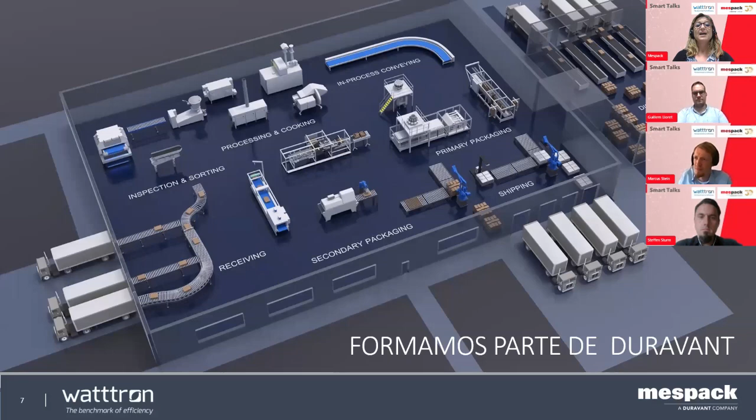Mespack, headquartered in Barcelona, is a global leader in flexible packaging and equipment for consumer packaged goods. We are known for our innovation in creating sustainable packaging solutions. Mespack has been part of Duravant since 2015, a leading player in the world of industrial equipment headquartered in Illinois.

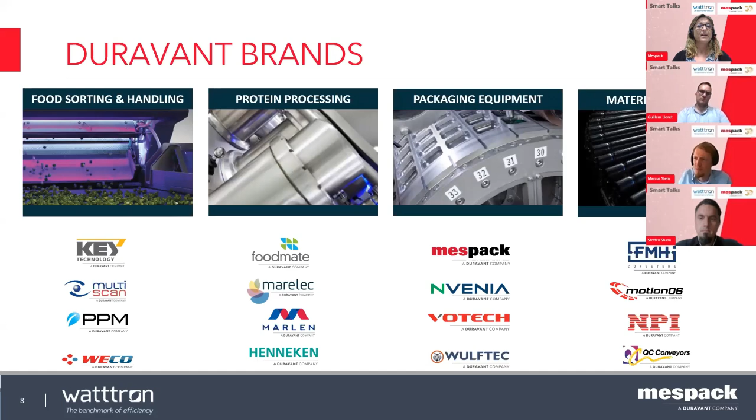Duravant is a global engineered equipment company with manufacturing, sales, and service facilities throughout North America, Europe, and Asia. Duravant offers immediate and lifelong aftermarket support across sectors serving food processing, packaging, and material handling industries worldwide through its diverse portfolio of operating companies and brands that you can see here in this slide.

About Mespack: established in 1994 as a horizontal form, fill, and seal manufacturer, it has evolved into a global one-stop shop with extensive services. With a sales team in over 90 countries and regional service centers ensuring prompt access to parts, we boast the industry's largest portfolio. With 380 employees across 17,070 square meters of facilities, our production centers are in Spain, the US, and India.

Mespack provides solutions for various industries, including food, beverage, pet food, pharmaceuticals, personal care, and home care. Additionally, we serve industries such as lawn and garden, agriculture, tobacco, automotive, and more. At Mespack, our talented engineering team designs customized integrated solutions for primary, secondary packaging, and end-of-line processes.

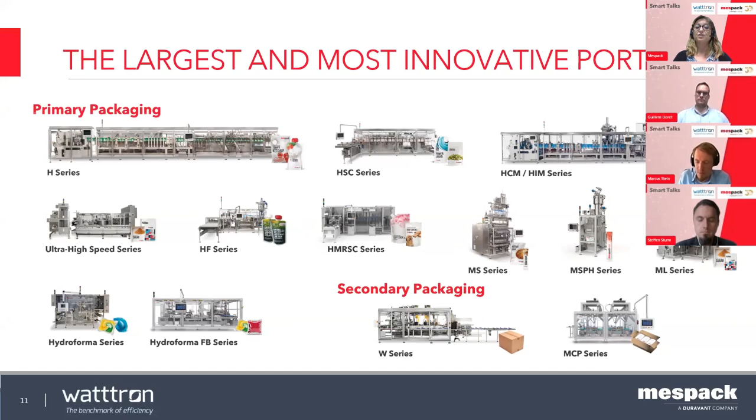With our extensive portfolio that you can see here, we offer high-precision, efficient, and versatile horizontal form, fill, and seal machines for flexible packaging, including machinery for pre-made pouches and a wide range of vertical form, fill, and seal equipment. Additionally, we provide hydroforma machines for water-soluble pods and end-of-line equipment to fit your secondary packaging needs, offering turnkey solutions if it's needed. So this marks the beginning of our introduction to Mespack, providing you the opportunity to familiarize yourself with who we are.

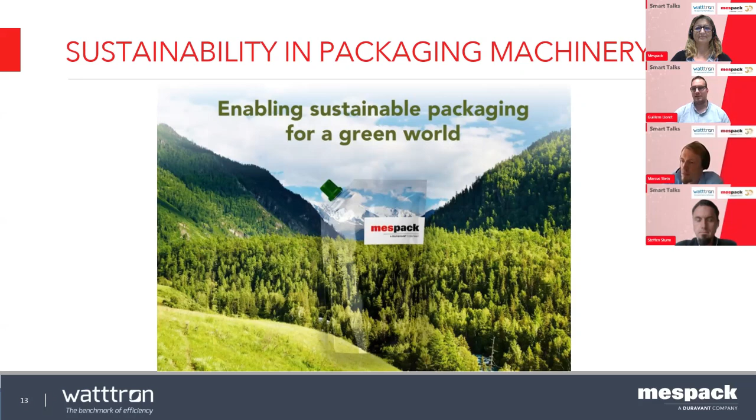No problem. Okay, so let's start with sustainability. What you can read here is our enabling sustainable packaging for a green world. This is really rooted in our DNA because we believe that we just have one planet, and it's all of our duties to keep it as best as possible, because otherwise we have no place to live. So with Mespack, we put a lot of effort and energy into developing new things to help our customers embrace this journey with us, so that every day packaging will be greener.

So to do this and conceptualize it, we have created the 6R strategies. All of you that have heard about these sustainability topics, you will know that it's all about R's, so everyone is making their own R's. So we have divided them into 3 different buckets. The first one is for materials, so what can we do on materials to make them better, either directly or with our partners. The second one is related to equipment, and the last one is to packaging.

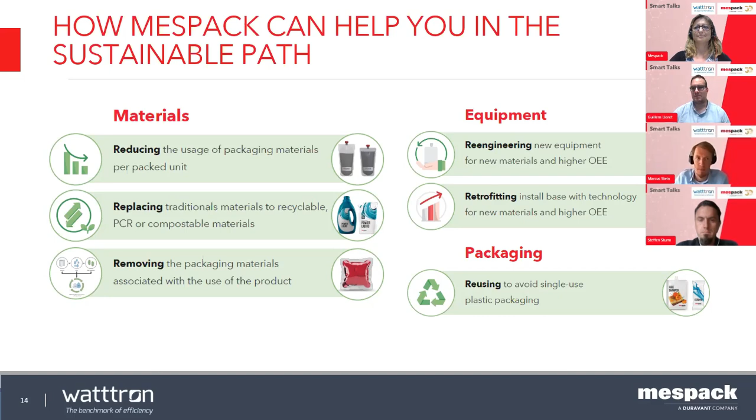On the material side, we have 3: reducing, basically using less; replacing, changing materials which are not sustainable for those which are; removing, which would be packaging that disappears. Then on the equipment side: re-engineering, to adapt our machines to work with the materials created through those previous 3 R's, and retrofitting, so that this technology can be placed in existing machines. Last but not least, reusing, which basically follows the path of eliminating single-use products.

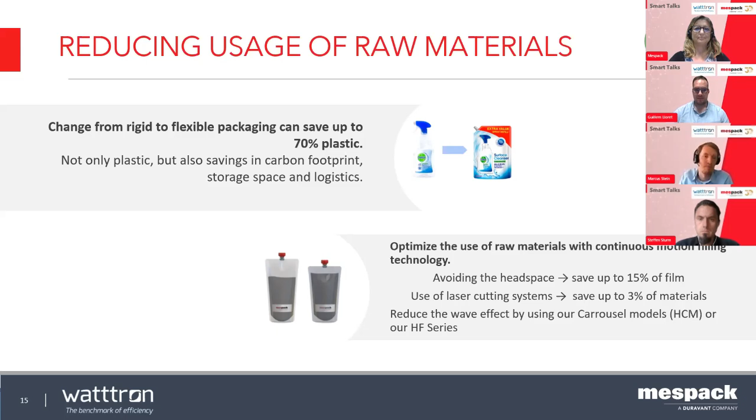The second R is replacing. We are in a position today, or a couple of years before today, where we had plenty of materials, basically PET materials or nylons, that were performing really well. We had answers for all the needs, with all types of barriers, products, sizes and shapes you could think of. But they had a very big downside: those materials were made by merging different types of polymers that could not be separated from one another. The new stream of materials, the sustainable ones that have come now, are recyclable, so that's a very good thing.

They comply with the regulations, but they are a little bit more difficult to work with in our machines. We have to face basically two different issues that are the most relevant. The first one is that they tend to be a little bit stretchy, so it's more difficult to control the accuracy of the machine. And the second one is that heat affects them much more.

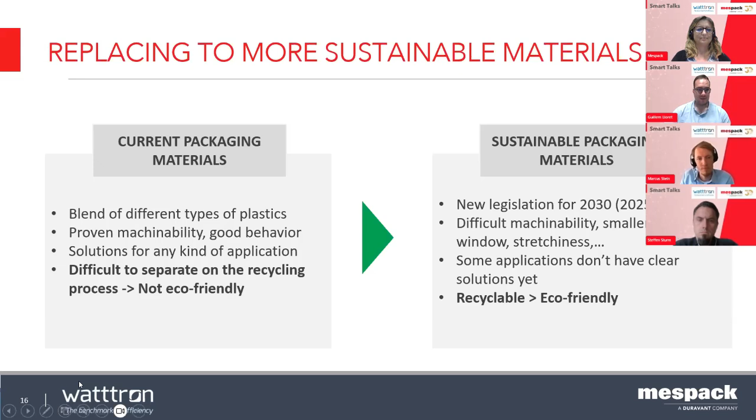So the sealing windows that we can work with are much more narrow. That's one of the whys we decided to make this partnership with watttron, and we'll explain how they can do that better than me later.

On the streams of materials that we see today, we are focusing now on recyclable-ready materials, which would be what they call the monos. Basically, the whole structure of the film is made with different versions of the same polymer, either polyethylene or polypropylene.

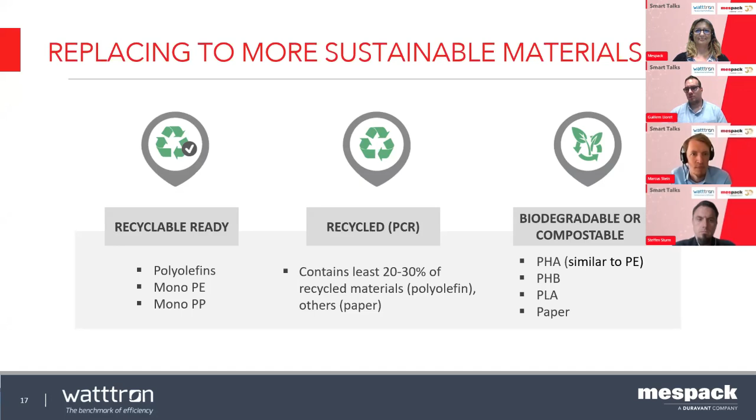There is a second stream of materials coming today that we are seeing more and more, which is basically paper, and also adding PCR, so film that has already been processed and recycled into the film structures. And the one we see more in the future, not yet here, would be the biodegradable or compostable materials like PHA or PHB.

This slide just shows some examples of what we have been working on in this regard of replacing, basically, the use of paper. This is very extensive on our customers that pack either powder or solids.

We've been working a lot on adapting technology for controlling these smaller differences, and you will see why with watttron we got a very good solution on that.

And also, we've been working with the biodegradable plastic films. This is a project that is ongoing. We don't have a solution yet, but it's worth mentioning because we believe it's the next step.

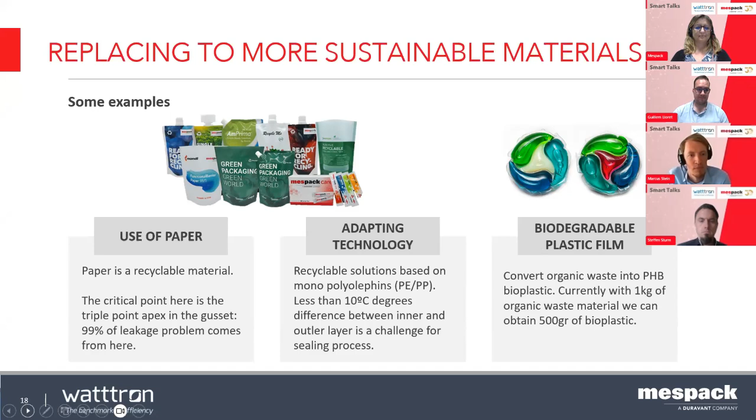Sorry, it went too far.

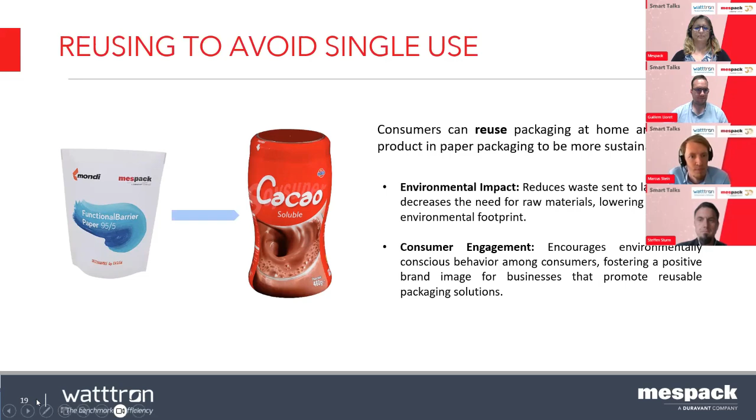But all these materials, as I mentioned, are a little bit trickier to work with. So we need to re-engineer our machines, make them better, make them more precise, to be able to work with them and keep the same performances that we are having today.

We have developed a lot of different technologies. Today we will talk about maybe one of the most modern or future-proof that you can see.

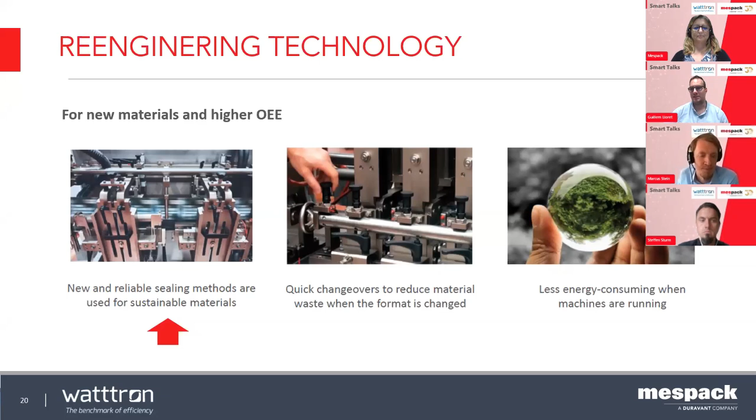But basically, when we do that, we face different targets to do it. Basically, that they do the job that it's required, but also that they will use less energy and that they will bring the quick changeover embedded on.

But with all these technologies, we keep in mind that our customers already have machines, and we cannot say, look, you have to throw your machine and buy a new one, because we know that's completely impossible. So everything we think of, we always think that there are machines in the market and that has to be able to be implemented there. This is not 100% of the time, but we try that at least 99% it will happen.

Here we put just some examples. The first one is the smart digital sealing from watttron that they will soon explain how it works. And there are other examples like the bottom jaw cooling or perforators with larger stroke. Those are technologies that we have been developing. This is just written as an example.

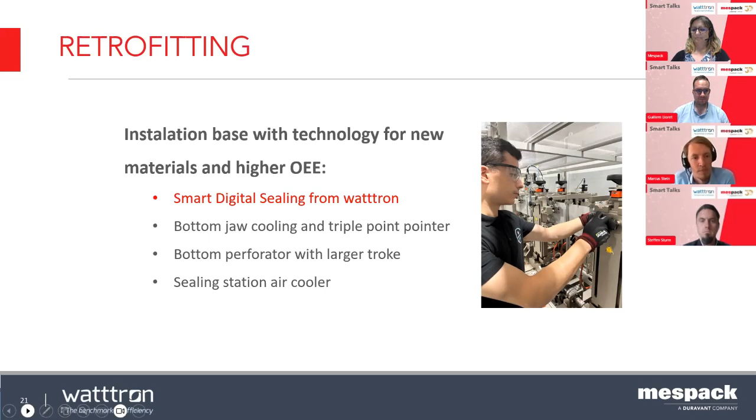And before passing it to the guys from watttron, I wanted to give 5 quick bullet points about why, so what we were looking for when we decided to make this partnership. The first one is to be much more precise on how we control temperature. As I mentioned, the new materials are much more tricky to work with, so that was a must for us. The second one, their process is fast, so they can heat up and cool down in a very fast way.

This can bring us a lot of benefits, especially when we start and stop the machine. We wanted the system to be energy efficient. Today energy costs are not super high, but in the future we foresee that they can be.

So we think that it's a good thing for the future. We wanted it to be integrated with Athena, our software platform, and whatever we would do, we wanted to have a seamless integration with it. We are developing that together and we will have this. We also wanted the system to provide us with data to do things in the future, and they can check all these 5 boxes properly.

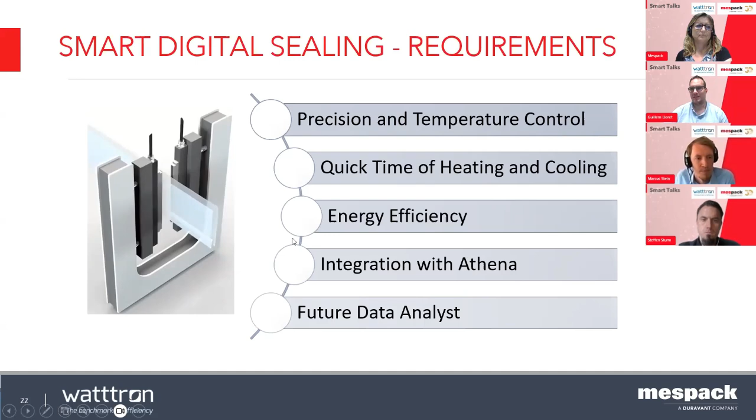Okay, so I pass it to Marcus.

Many thanks for your explanation. I think, first of all, thanks Guillem for doing your presentation. I can now only reinforce your points—you already raised the main points about our technology. It's a great pleasure for me and my colleague Steffen to talk to you about the great cooperation between Mespack and us, and to give you a little bit more insight into our digital heating systems.

So for me, the goal is the following: first, I want to demonstrate the clear benefits regarding increasing the productivity and efficiency of your production lines or packaging lines today. Secondly, I want to explain why digital heating is, for us, really the enabling technology when it comes to monomaterials and monomaterial processing.

And the third one, already shown and mentioned by Guillem, is that we are not only looking at new machines. The system has a great advantage in that it can be very easily integrated into existing machines and implemented as a retrofit.

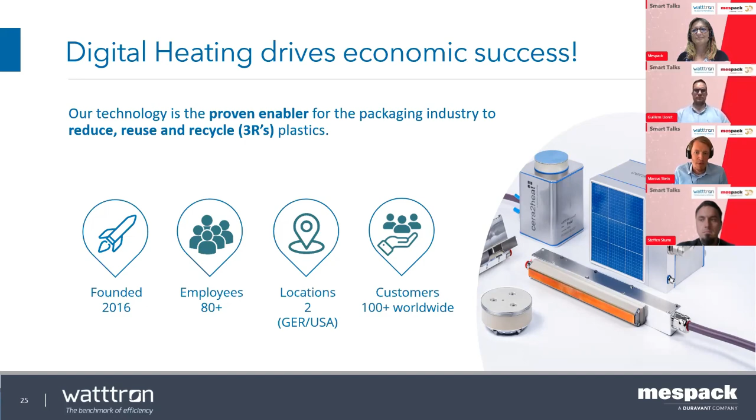But let me come back to the technology, and let me start with a short summary of the aspects or topics raised by our existing customers—typically the biggest challenges, even when processing normal materials, but much more so when it comes to monomaterials.

That's really the biggest and most relevant reason why recyclable monomaterials are still used so rarely. More CPGs are reporting, and you can see this in the media, that they are much behind their own goals set for using recyclable packages. This is due to the lack of productivity compared to standard laminates.

This lack of productivity is mainly caused by a forced decrease of machine speed and an increase of losses during production, for example during a restart of a machine. We saw a real case at a customer who had to lose 25 pouches when restarting the machine after a stop. After the retrofit, he only loses 4 pouches, which is a relevant factor when deciding whether to change to monomaterial or not.

The second aspect is the much higher risk of quality issues with pouches or pillow bags made with monomaterials. It's clearly measurable, typically as an increase of packages with leakages, mostly in the triple point, which is the critical area, or you have clear burning marks or strained areas in the heated area.

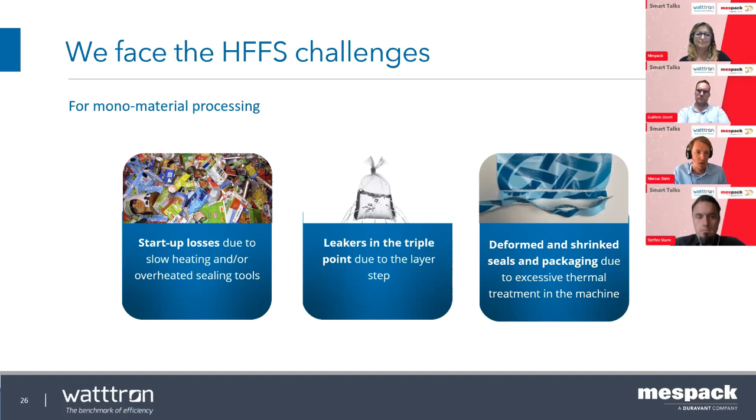So the question now is why digital heating is solving these quality issues, and why equipped machines in the field already show a clear improvement in performance and an increased number of qualitative packages. What is the magic? The magic is local defined heating.

Instead of a large heating source, like a heat cartridge in a sealing jaw, which shows a very slow running control performance with many delays in the reaction of the heating system causing temperature variations, we created a heating system we call digital heating, based on very small and individually controllable heating pixels.

The pixels are very small, only about 5 by 5 millimeters. This is very specific: each pixel, and I really mean each pixel, each 5 millimeter heat area, is heated and controlled separately from each other.

These pixels heat directly on the surface and are only covered with a small metal layer, which at the end is the sealing profile.

For the engineers in the audience, such a pixel can heat up with up to 70 watts per square centimeter, so they are very powerful. In comparison, a normal heating jaw has only 5 to 10 watts per square centimeter. This gives a very high dynamic of control and fast heat up, combined with low thermal mass, resulting in very defined, local, and precise heating.

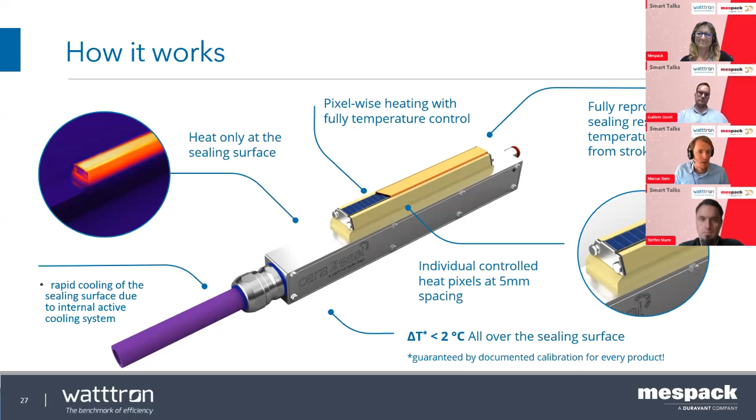Thank you, Markus. So Markus introduced to you what is behind, or more or less inside the sealing jaw, but what does it mean regarding a whole packaging machine? For example, let's have a look at a Mespack HFFS sealing machine.

So we have and will provide different types and shapes of sealing jaws, all with the same technique: pixel-wise heating in a really small resolution of heating pixels.

For example, we have these vertical sealers. Markus mentioned, and also Guillem, that you can adjust pixel-wise, especially in the most important area, the triple point.

You can adjust for special monomaterials very precisely the temperature, and then you are able to achieve this really narrow sealing window. Then we have two different types of bottom sealing jaws, the straight one and the format sealing jaw, which can be provided with different format plates, different shapes, and so on, according to the needs from the customers.

And we have these top seal sealing jaws, the flat one, which is more or less the same as the vertical, but in another design outside.

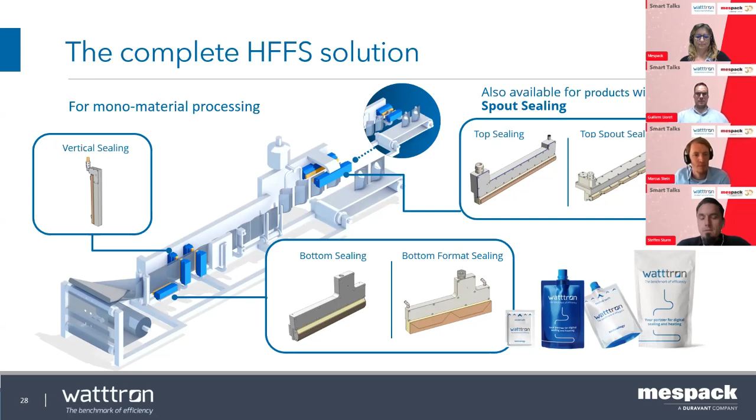For that, it means we can equip a whole machine with the digital sealing. What else? We have tools for the HFFS circular as well, what we call internally the high speed or higher speed machines. We can provide tools for VFFS machines, which have some more differences and advantages regarding the layer jump to the fin sealing.

This is also all regarding flexible packaging, and besides flexible packaging, we can also provide sealing tools for rigid packaging, for FFS cups and FFS trays. By the way, besides our sealing tools, we also provide heating elements to produce these trays and cups as well.

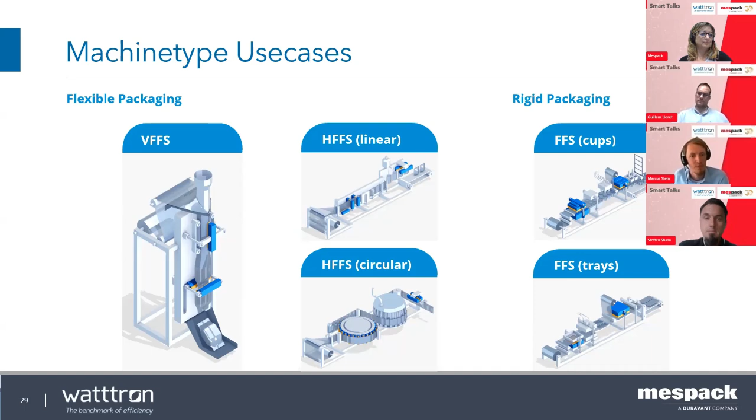So what does it mean? Guillem talked a little bit about it. The main USPs on our side are processing the monomaterial, which we talked about for the last 30 minutes.

Energy saving, I will show you some slides later on. The fast ramp up and cool down is really a tricky thing, because we are able to run the sealing jaws with 10 to 20 Kelvin per second, or degrees Celsius.

That means you will be ready to seal within seconds. And also the cool down will be much faster than if you have a full metal sealing jaw with a heat cartridge.

Marcus said the machine integration is really easy, for new machines of course, and also for retrofit. We have done a lot of retrofit installations on old machines, some of them in the age of 30 or 40 years, so it's no problem to integrate them into the machine. Also, if there are machines which are a little bit tricky, we have good engineers to solve these problems as well.

And by the way, we can also increase the productivity because of the lower amount of not well-sealed products, and by reducing the start and stop pouches.

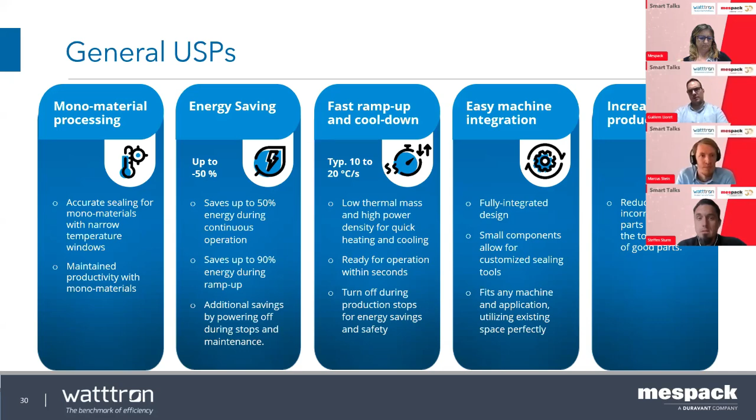Here on the right side, you see our user interface. We can talk about that later on, but just to show you how it looks, we can provide such temperature profiles to achieve a better sealing on the triple point, and we can also switch off sealing jaws in case of having smaller pouches but a large sealing jaw, and so on.

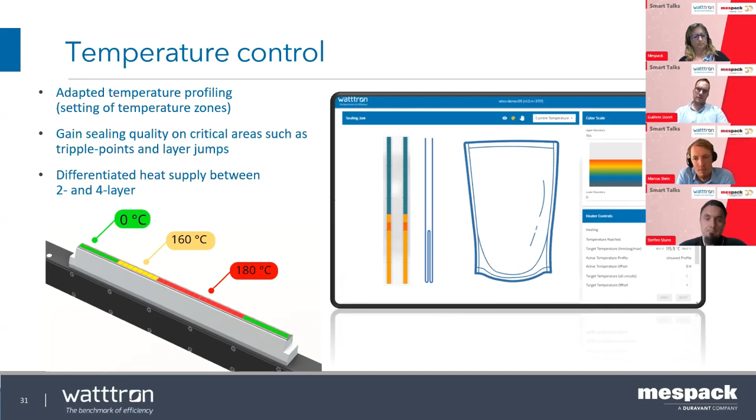Coming to the saving potential, this is just an example, and as we have also seen on retrofit machines and installations in the last months, by using the Watttron cera2seal technique, our customers have been able to increase their outcome. Just to give you an idea of what that means in cash, this is just an example.

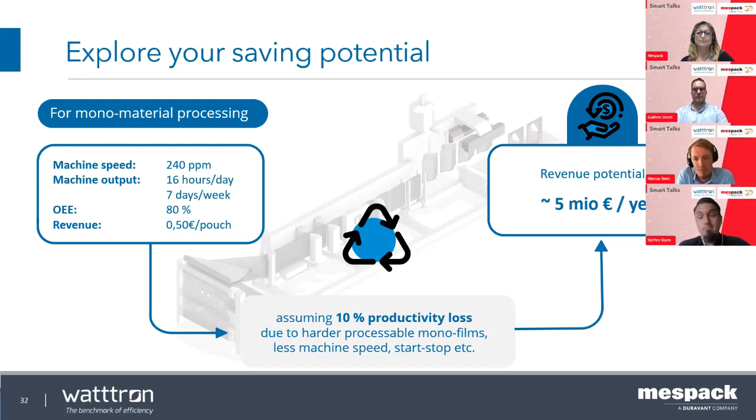That means if you open the machine and the operators need to do some cleaning and so on, you can touch the sealing jaw while heating. So this means really less thermal impact in the machine.

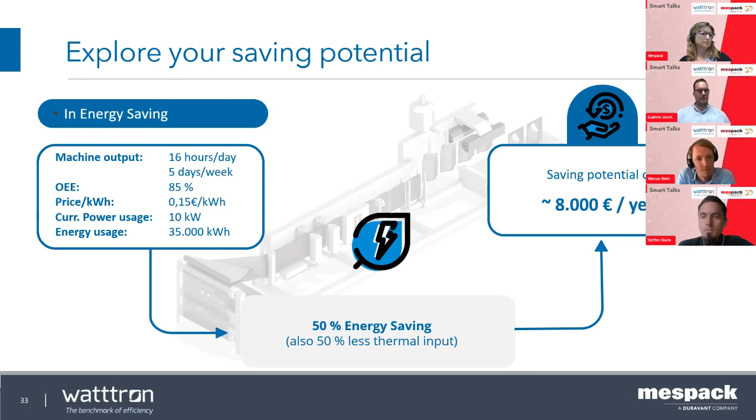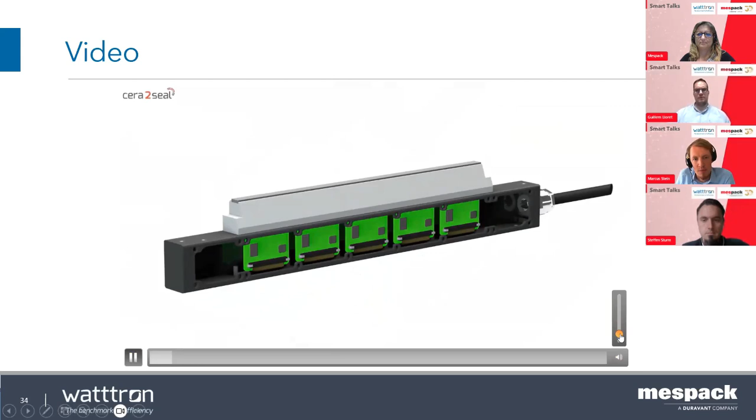So it should work. Yeah, I think we see again a short summary of this, what Steffen and Guillem and I measured.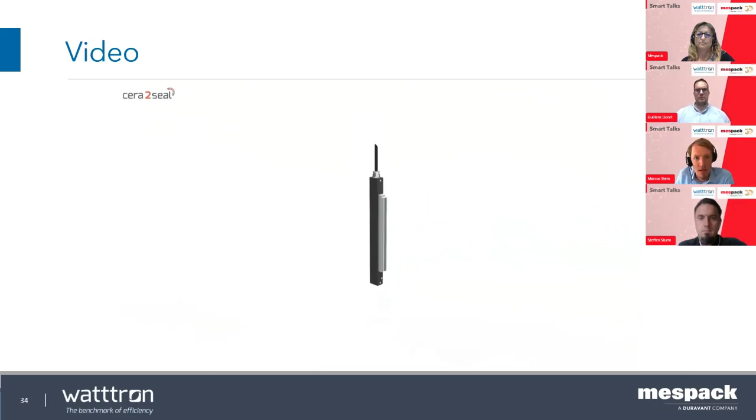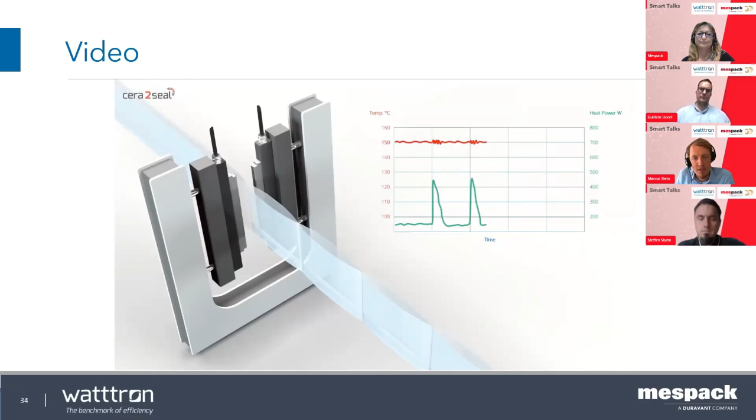We have the sealing jaw with the heating pixels behind such a sealing profile, and the sealing profile can be the standard like you have today. But very important to understand is that the sealing jaw works quite differently than a standard system. It's heating in the moment when you have heat consumption. And if there is no heat consumption, for example, you stop the machine, it stops heating but keeps the temperature constant. This is the difference: heating on demand.

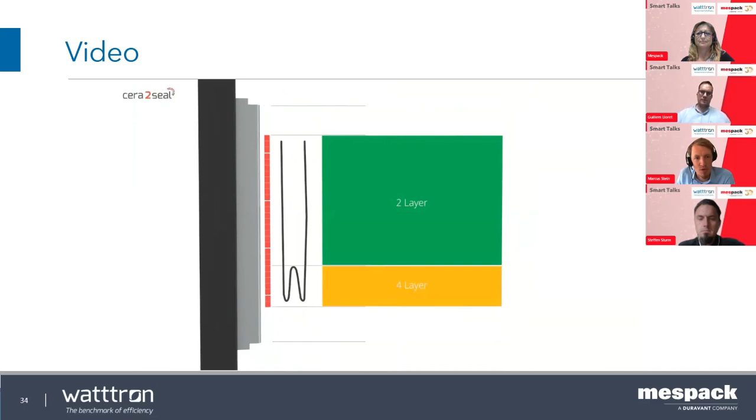Then you can have this local advantage. Pixels who are in this 4-layer area see a higher heat consumption due to more material. This higher heat consumption is at the end controlled by a higher heat production. And this is exactly the key to having a qualitative seal on such a layer step or variation.

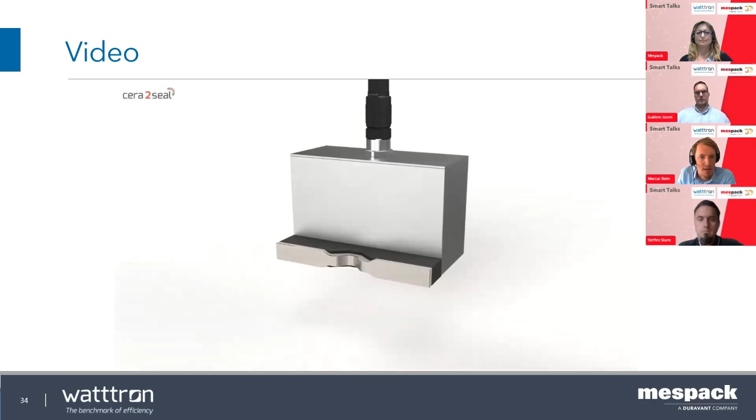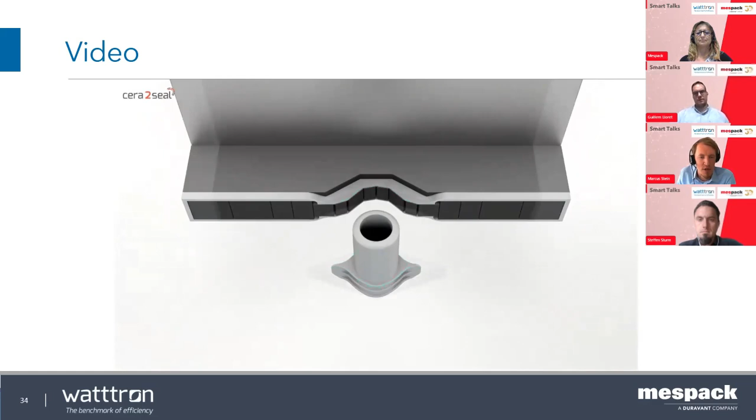This variation you not only have in terms of a pouch with a layer step, you have this variation especially when it comes to spout sealing. A spout, injection molded, let's say a very thick part compared to the film, needs a different heating than the film.

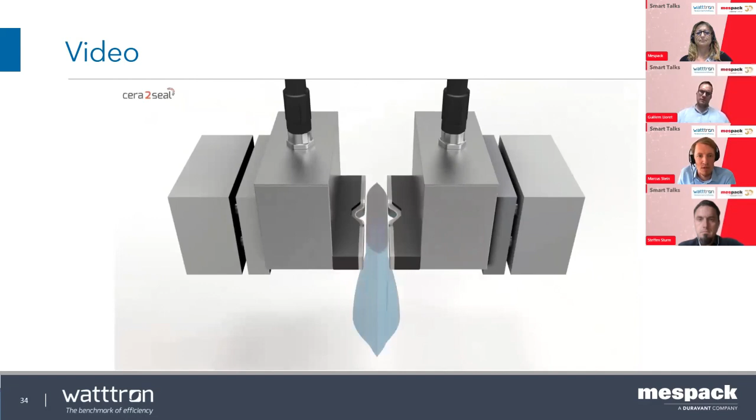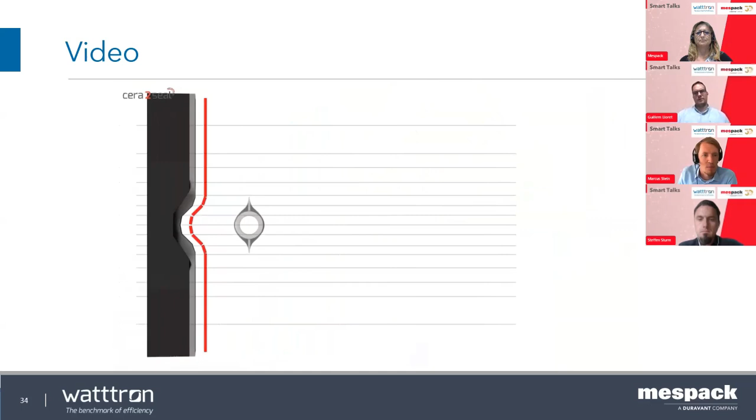By the way, for this application in the field we won the World Packaging Award together with watttron, where we first enabled a mono PP pouch on an FFS machine, a horizontal form fill sealing machine. But the principle is still the same as what we saw on the sealing jaw. The local variation, in this case the pixels in the spout area, produce more heat than in the 2-layer area, so it prevents overheating, melting, or shrinkage of the shoulder area, but still you have the control to get a good, tight seal in the spout area.

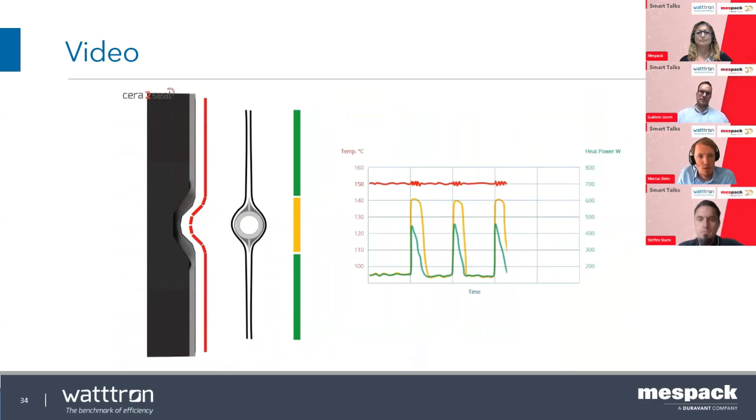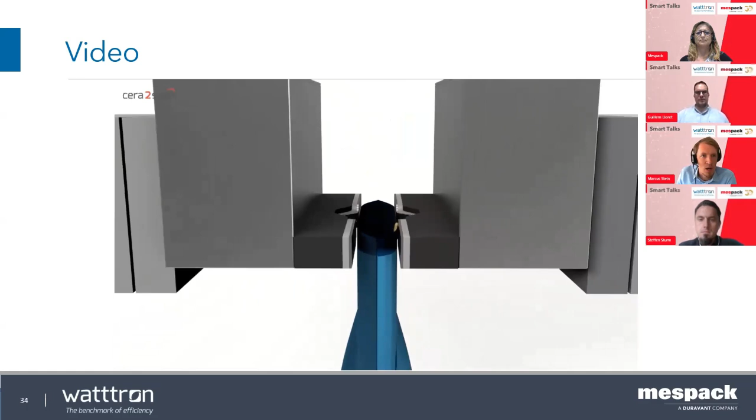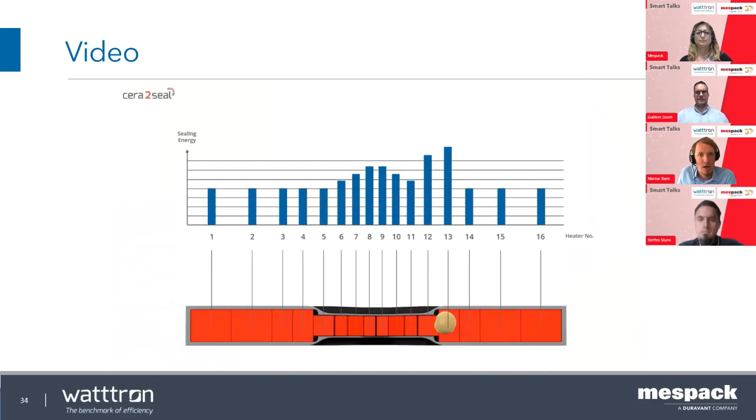Another thing we are working on, we call this the inline quality check. We can use the information from the pixels, how much energy they use, to look into the sealing process and get an idea what happened during sealing, because there's a difference if you seal the spout area or the film area, or an area with contamination, for example by product. This causes a local variation, and we are working on algorithms to control exactly this.

Yeah. And here you can see such a...

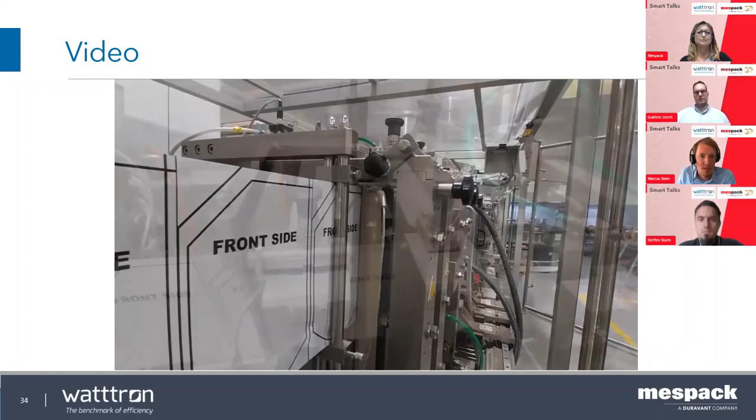Retrofit of a pouch machine, and this is the pouch lab, so it's available to run tests. We designed it so it fits into packaging, into Mespack machines. This is, let's say, solved. The mechanical implementation is solved, the software implementation is solved. So I would say it's ready for you to think about and to move together with us to the next step, towards sustainable packages.

So I take over to Guillem, right, for the last part.

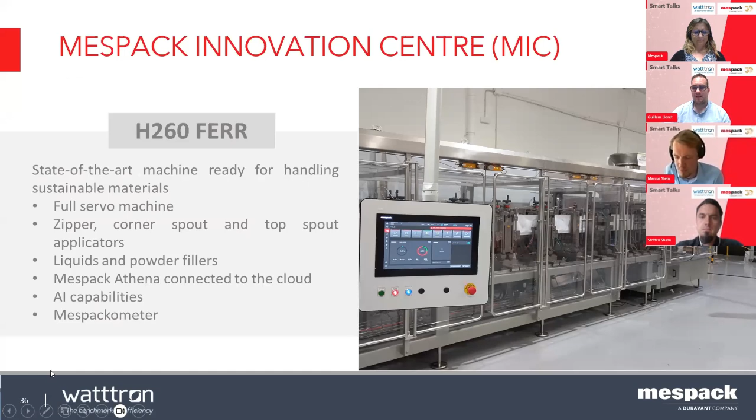Just to wrap it up, about the trials that we do there, we think it's a very good thing for our customers and partners. Basically we do everything in a controlled environment in a very scientific way, so it's very repeatable over time. All the data can be compared to previously acquired data to make decisions. The results are accurate, and we get a lot of know-how on what needs to be installed on machines.

We avoid downtime. Our customers like this a lot because they have a machine at their disposal with one senior technician, and they do not have to stop their production line, so they are not losing money at the end of the day.

We are getting a big database of knowledge, so it takes less time for us to evaluate if a film is working or not, the same as with technology. We think that with this partnership we can go one step further, working more efficiently, even on more complicated films that today we could not work with, and have an overall better output for the future.

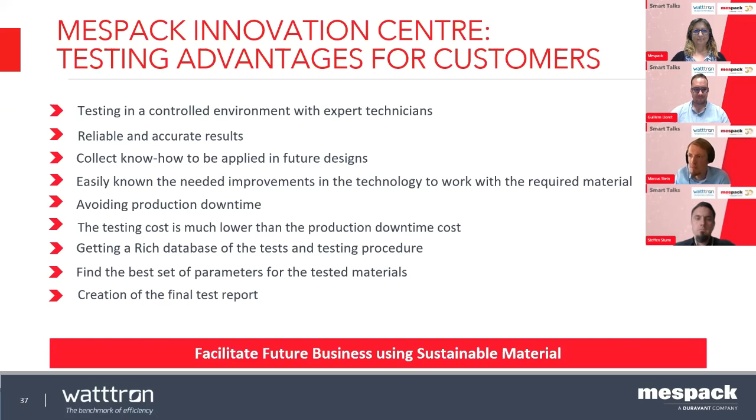As I mentioned, we've made plenty of tests, and with that we'll wrap it up. Those three sentences synthesize very well what we are trying to do.

As we mentioned, challenges are not something from the future, it's something happening today. Our customers are embracing it today, as Marcus mentioned, not as fast as they would like to, so we are trying to help them do it at a faster pace. We want to adapt our machines to work with those technologies, and we are doing it already. We have plenty of customers already working with sustainable materials successfully, and that's the important thing, not losing productivity.

At the end of the day, all we try to do is help our customers, work with them along this path, and be by their side for whatever they need. That's all from my side. Monica, you want to take over?

Thank you all three for your participation. This trend topic, smart digital sealing for sustainable packaging, has been very interesting, providing valuable insights into the precision and efficiency of sealing product pouches with monomaterial films.

With such an engaged audience, let's move to the round of questions and answers, some of which we have ready. First question: how extensive is the effort required for a retrofit?